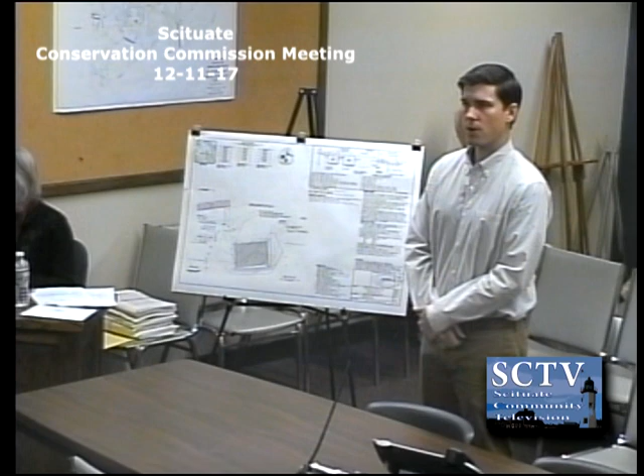Other than that, we do have a siltation fence going around the limit of the work, and the area will be reseeded and it will become grass after. There are 3 trees that need to be removed. Other than that, yeah, it's all grass. We are waiting on additional comments from the Board of Health, so we'd like to kind of hear your input on it, but we're not looking to close the hearing this evening.

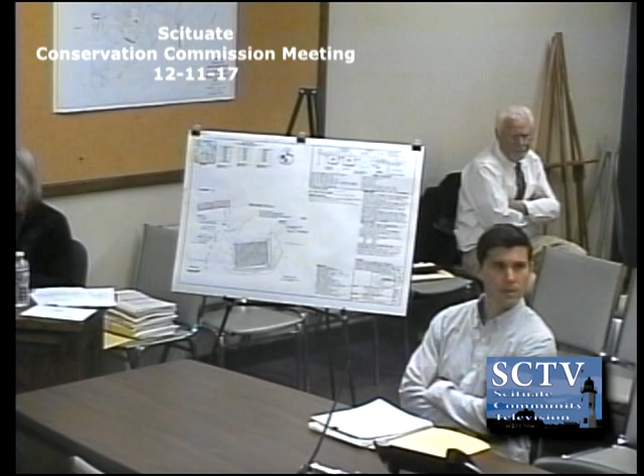Which direction would that make a difference? Honestly, I'm not totally sure. It has to do with working around the tee boxes and the greens, and the grading as well.

Do you not know if it's gonna go closer to the house? We're very far away from the marsh, it's kind of just fine tuning. We might move it a little bit one way or the other, but it won't move very much at all.

If you look at this plan, Penny, it's a good distance away. Well, he said 10 to 15 feet it might be moved, so I... Yeah, but even so, that shouldn't be a problem.

I think I'd recommend keeping it open, just in case a revised plan comes in as the final plan.

And you're with it here because it's within 100 feet? No, because we're in the floodplain.

Okay, anybody else in the audience? So I make a motion to continue the Hatherly Country Club to January 8th at 6:15. Hopefully it should be pretty quick. Second. All in favor? Aye. Thank you.

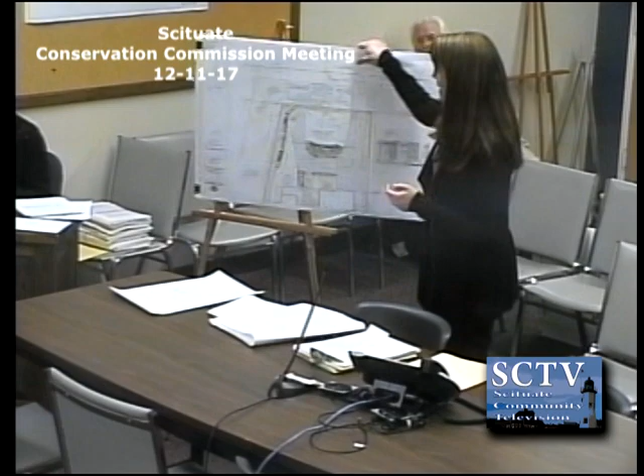My name is Tish Campbell, I'm a landscape designer representing the Keblers at 104 Edward Foster Road. They would like to extend their driveway to make a crushed stone driveway. The property sits between the marina and the ocean, so it is part of coastal storm flowage in this area.

The marshes over in this area have a 50-foot and 100-foot zone. They really wanted an asphalt driveway, but we told them the best thing would be a pervious driveway of crushed stone. So we designed a small parking area and a turnaround so they could exit in a safer way onto Edward Foster Road, because it gets kind of busy, and guests would have a place to park instead of parking on Edward Foster Road.

The base course will be crushed stone for some part of this area in order to get it to perk into this area here. We have also designed a rain garden, and I have a small detail picture of the rain garden if you want to see it.

There's a detail for your rain garden. I think there are two.

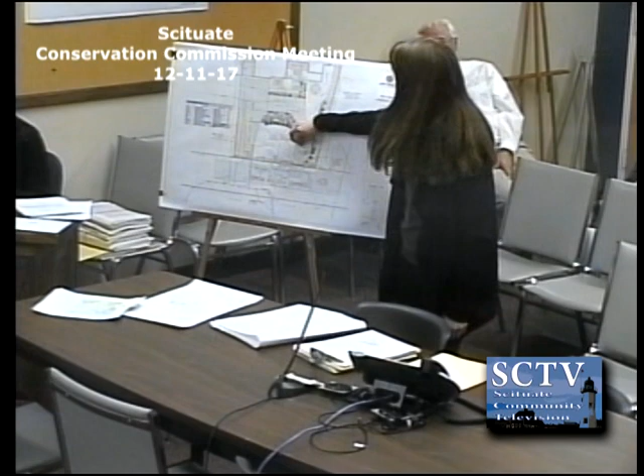The parking area here drains all into the rain garden this way with all the plants. This extension is constructed so that it drains into the neighboring lawn areas. The area as it is now is already disturbed, just a front lawn type area, not native or anything like that. It's about 1,500 square feet that we would be disturbing and replanting with about 1,500 square feet of plants. Then this area would be returned back into the lawn area as it exists now.

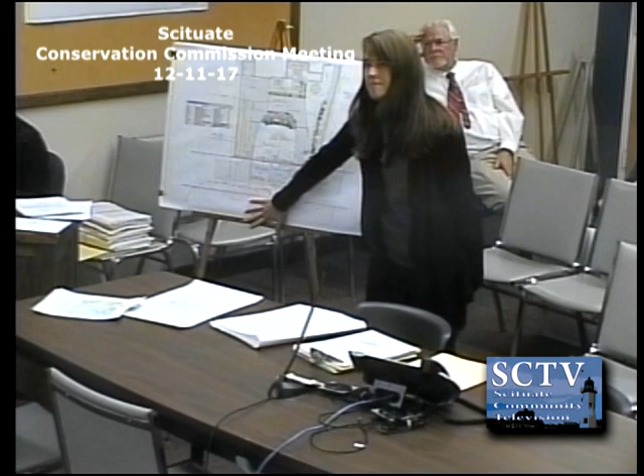Where's the line for the 50? It's here. The marsh is across the street, and the harbor. You've got wetlands and bank on both sides. So the velocity zone is up over on the other side, and this one is just the AE zone in this area.

Is the existing driveway asphalt? It's already there, yes. Be nice if they made that crushed stone instead. Nobody should have asphalt over there. I agree, but that isn't what they're asking. I know, I'm just making a point.

I'm shocked. We gave them good advice though, not to try to put asphalt. Not to try to put asphalt. No, it's a disturbed area, it's pervious, they're making it pervious, I don't see a problem. Unless Amy has an issue.

How many square feet is the proposed driveway? That's about 1,500, exactly 1,518. Okay, and that driveway is going on existing lawn, you said? Yes, this driveway is going on existing lawn.

So there's a gate and a gap in the hedges because apparently it was in the original plan to have a driveway that would go that way. So it reads as if there is a driveway there, but it's just lawn.

We just redid that house a couple of years ago. Amy, thoughts on this? Yeah, no, I don't have substantive comments either.

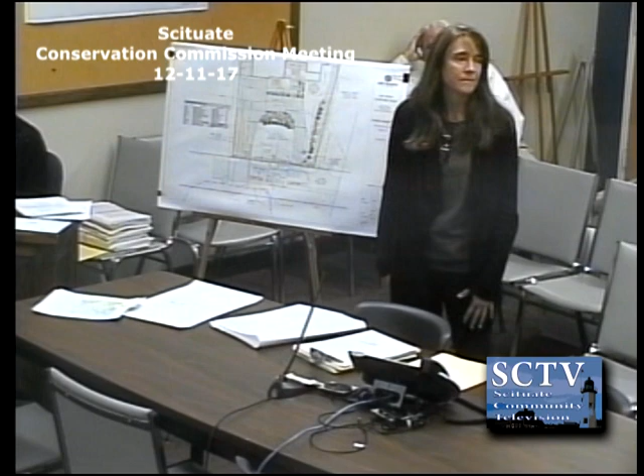it's the resource areas across the street, it's already been disturbed. They are compensating with the stormwater controls, the rain garden and nice plantings, so all good, things are pretty straightforward, it should be good.

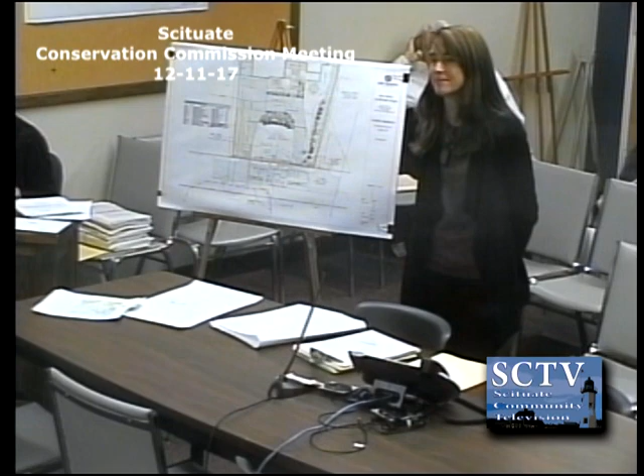Anybody in the audience to speak to this? Any issues, Frank? No, I don't think so.

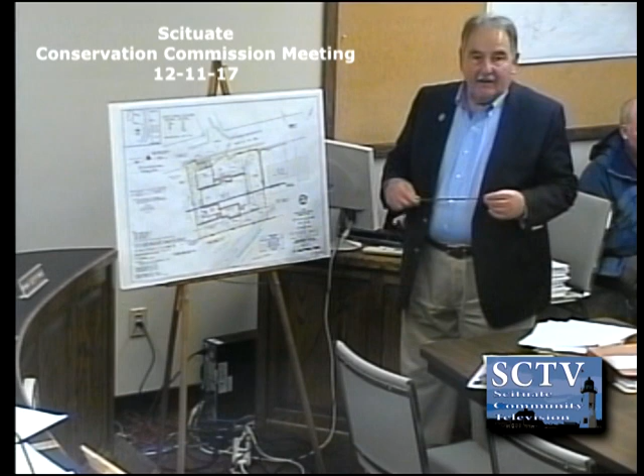At the last meeting, I had estimated roughly 1,200 cubic yards of fill. That's been reduced to about 400 cubic yards. The fill would be underneath the house, and in the driveway that will slope from the street up to the house, and then there'll be some loam in the front yard as well to have a lawn and some planting beds in this area.

There's also a lawn area, or perhaps planting beds, down by the existing concrete wall, which is going to remain in place. What we've done with the fill is the top of this wall is elevation 13. We're going to hold the top of that wall and slope it back about 2% to elevation 14, simply to allow any water that comes in to flow back toward the ocean.

We're proposing to put the fill in here as required with processed gravel, which would be compacted, and on top of that we'll have approximately 4 inches of crushed stone underneath the house. So when you walk into the house, it'll look like a fairly flat area.

The front yard will be sloping from the front of the house out toward the street. There's also a swale proposed for the right side of the yard to direct the water down in this direction, which it is currently doing at the present time. But with the regrading, this swale will be more visible than what's there now.

This is the existing house to the right of us, which is fairly close. Right now, the contours on this plan are going in this direction. The water's all flowing from the northwest to the southeast, as opposed to straight down from the street.

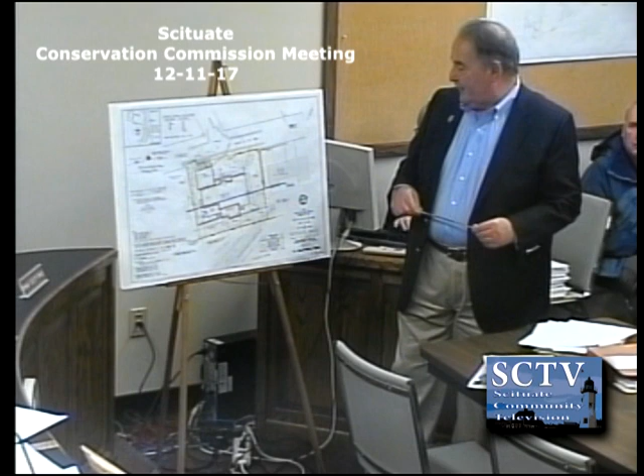So with that, I'll end and answer any questions you may have.

Oh, one other thing - by reducing the fill and changing the design, we were able to reduce the impervious area down to 6.9% from what it was before. Thank you.

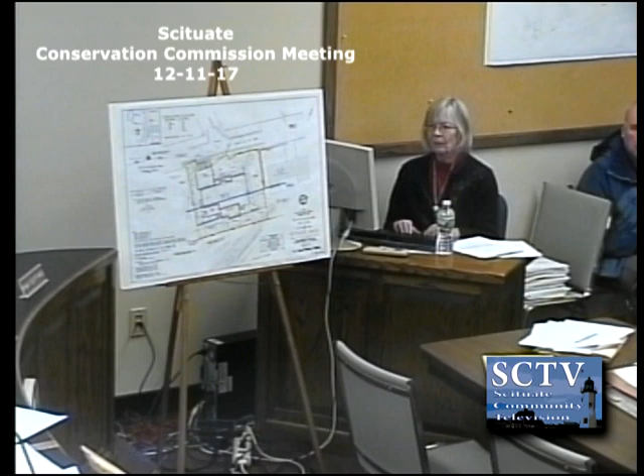I want to add that any fill - we received the revised plan, I think last Tuesday, so... No, the revised plan? We're still kind of processing it. Yep. Oh, yeah.

For the record, Jim O'Connell, coastal geologist and certified floodplain manager with Coastal Advisory Services. I was retained by the commission to do a peer review of this project.

This is, I think, the third or fourth revision, but the revisions I've seen so far have been very beneficial to the project - positive in terms of changing what was an impermeable driveway to a pervious driveway, particularly removing the vertical wall over here which was in the velocity zone and could cause unpredictable significant impacts, and removing the wall over here. So elevating the house above the base flood elevation to velocity zone standards, I think, is all very beneficial to the property owner as well as protecting the resources.

It's a complicated site in terms of what they're proposing to do, particularly the fill in the velocity zone and the significant fill in the A zone.

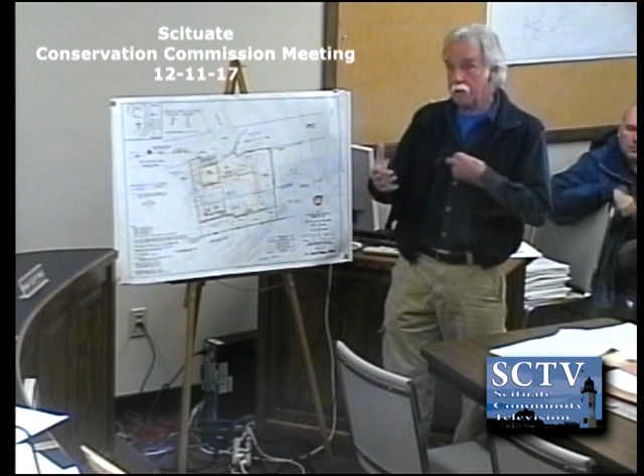I'm curious about the stormwater coming down this road. I've heard Paul say there's no water going onto that property, but I don't know if there is or not. I submitted a report today with photographs of this road. There are two catch basins that capture the stormwater, but the berm along here is only about 6 inches high. I don't know the volume of water coming down this road onto this property, so I can't answer whether that's going to shed water over to this area. But you've already approved this vertical wall here, so if there were water coming down here, because of the fill, you're going to somewhat divert water in this area to the north.

But you've got this vertical wall, so I don't really see what's going to happen based on the contours. If the water were to overtop the wall, it's going to hit this fill here, and because of the contours, it's going to orient down into the 25-foot easement. I don't see that as a real negative - I don't think the water velocity is going to cause any significant impact. But I do find it curious, Paul saying there's no water coming into this property at all. We have a swale over here and contours over here - maybe this is for walking off the lawn, I'm not sure. But these contours, if there's rain coming off the road, will orient that runoff, if it's coming onto the property, down into the easement area. I don't see that causing a real significant impact.

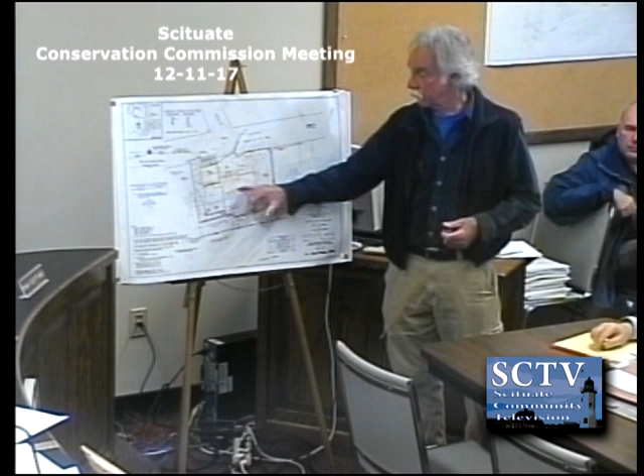My main point is that this small coastal bank here is playing a role in dampening some of the wave action, particularly in the A zone, in what I'd consider a wave area of 1.5 to 3 foot waves. I think we could work something out on that - that would be good. But I don't think the fill creating a flat surface is going to dampen it as much as this little basin and existing coastal bank in the area under the proposed house.

Can I ask him a question? Sure, Jim. I want to be very clear, because I questioned right from the get-go when I realized there was fill. Am I understanding that it would be better without the fill under the house? I don't see the reason for the fill under the house. Yeah, to me there's absolutely no reason to bring fill into this property, as long as the pilings are even on top - that's where the house is going.

It's an interesting question, because there are two answers. One, it's the benefit to the property owner. Well, that's not my concern. I realize - I need to tell you everything I'm thinking. There's a lower basin here where the water could possibly pond and cause a lot of turbulence under the house. In terms of protecting flow in this direction, the fill will diminish the protective quality of this particular coastal bank, as small as it may be - it's only 2 to 4 feet high, but it is playing the role. So I think the fill will possibly cause more flood flow in this direction under significant storm conditions, 100-year storm conditions.

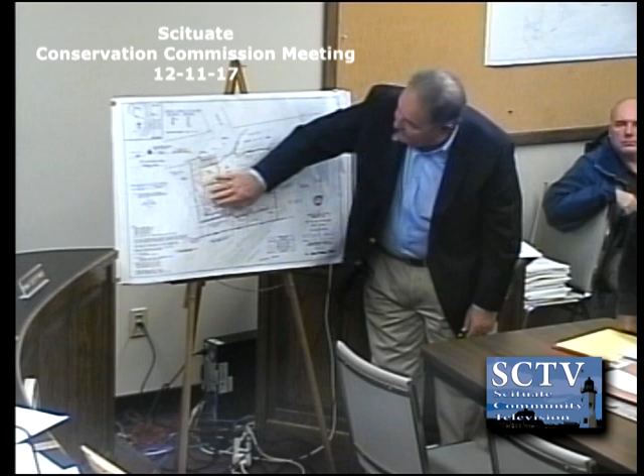This land in here, once the house is gone, it's going to be the same elevation as the land here. There's nothing to protect it. If this wall stayed here and we built it up, it would clearly stop water going this way. But even if you don't put the fill in here, once this house is gone and it's on piles, the elevation of this land is the same as the existing ground. I think putting that fill in there by leveling this off forces the water to come in here.

Absent any storms, when the tides come up, the water comes in here and it goes between the wall and this easement, and it comes up and would go in this way. Once it goes above 13, without wave action, it's going to overtop this and then come under the house.

But I don't know what the effect of this breakwater is. This is elevation 14. If the waves are at 17, and you've got a valley here, and then another wall, isn't this going to break the wave so the energy wouldn't be as strong as it would be if this wasn't here? This is breaking the waves. It will significantly break the waves. I think it's a real plus for everybody along there to have that.

But the point is, I'm going on FEMA's flood insurance rate maps, and they're saying that this area is subject to a minimum of a 3-foot breaking wave landward of the breakwater. The breakwater is tremendous, yeah. So you've still got 3+ feet of breaking wave on the lot itself, under the proposed house.

But you would have that anyway. Without the fill, you'd still have a 3-foot wave coming out of this property. What you said is precisely my point, actually, because the lower elevations under the house, fortunately, will cause turbulence, and it will help break up any wave energy on that particular lot, preventing any additional water where you fill it from cascading to the southern property.

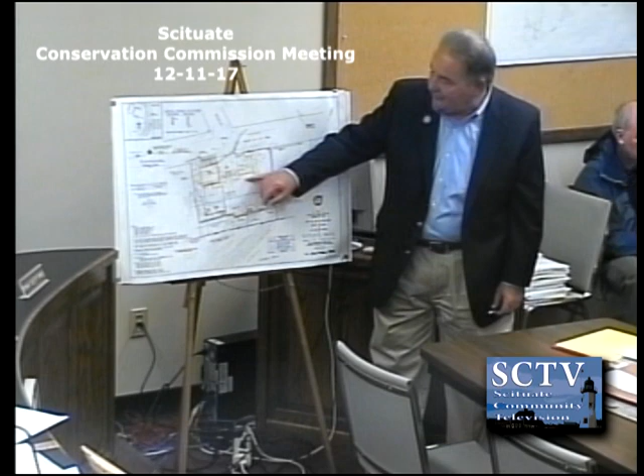This is the existing garage, which is elevation 10. The grade here would be about 13 and a half. So right here, you'd have about 3.5 feet, but once you get away from here, the fill is only a half a foot. It's gonna be about 2 feet here. This is where most of the fill would go, right in that one depression. Once you get over in here, there's very little fill. And then the rest of it's up in here for the landscaping.

To clarify things, I agree there's going to be great turbulence there, and it's already happening on that property. But my question to you is: the existence of that coastal bank slope, will it dampen wave energy relative to the fill you're proposing to put in?

We can talk degrees, and we don't know degrees, but in my opinion the existence of that coastal bank is going to help diminish some of the wave energy as it's cascading towards the southern house. If you put the fill in, you're still going to dampen some wave energy because of the composition of the fill, but the coastal bank is going to dampen the wave energy more so than the fill, in my opinion.

But once this house is down, you're up on piles. It's always hard to predict what these bigger storms are going to do. Because the land is sloping in this direction right now, the water's still going to go in this direction as it comes up.

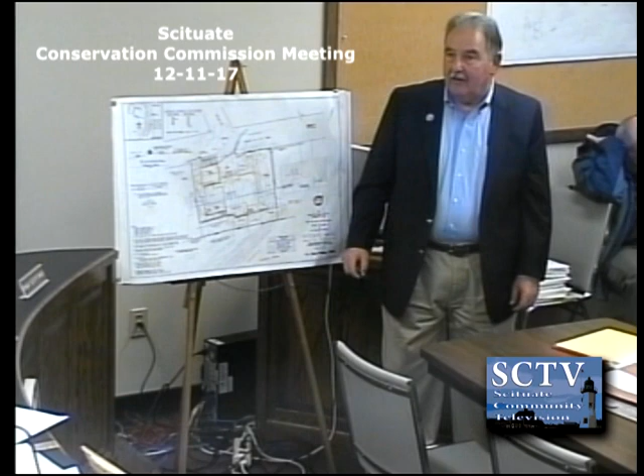Maybe in layman's terms, if that ground is sloping or uneven, as opposed to being filled and a level grade, that would tend to slow down that wave action, as opposed to filling it in and making it level so that the water would just move right across it, I think is the point.

And it's slow moving, slow moving, I'm sorry. There's a coastal bank there, at 13, right, Jim? Right in front of the front door, kind of right in the existing house, right here. So it's keeping this at the 10 and going up, creating that resistance when it goes uphill. Correct. So we can leave that.

It's under the house, I mean, at the end of the day. I have a question for Jim. So the first step... You two guys should probably just introduce yourselves. Oh, I'm sorry, I'm the homeowner. Ken Fitzpatrick. Steve Gard, attorney for the homeowner.

The first step would be that the 10-foot depression area would flood. That would be the first step of a coastal issue. And then over the top, the waves would start to flow.

I was wondering, how does the 3 feet of water that's now standing in the 10-foot area affect the wave action under the house, as opposed to if it was filled with dirt? Wouldn't there be more friction when the bottom of the ocean is closer to the top of the wave, to slow down the wave?

So now we've got 3 feet of water in that pool. Now the water's breaking over the top of the wall. How does that affect the coastal bank's effectiveness, I guess? It's as the water is moving south.

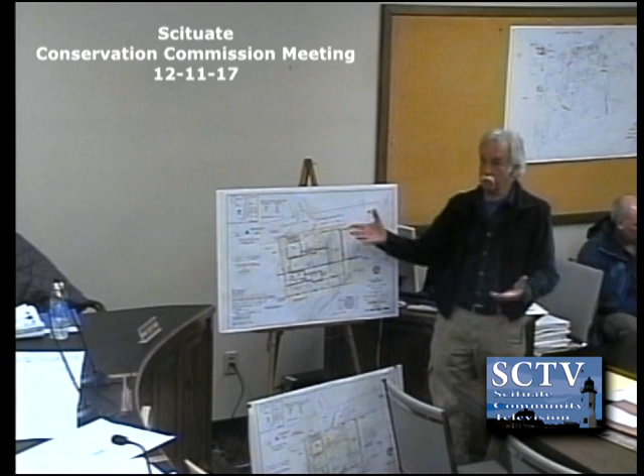I do have a question. Where's the garage? You didn't highlight it on your detached plan. I don't see a word anywhere that says garage. There's a garage somewhere, but you didn't color it. Here's your parking area. So you're saying the newer proposal, it's a proposal, right there inside the house. They're gonna drive into the house this way. It's a little deceiving, Jim, it almost looks like the garage is where the parking is, but beyond the driveway, the cars are gonna park here and here.

You have a 20-foot wall here. Top elevation 20, because the first floor of the house is 21. So what they're gonna do is drive into 20. The floor of the garage is 20, and they'll step up a foot to the first floor of the house. The top of the piles is 15, with a 12-inch frame on top of the piles. The top of the ring wall is 20 feet, concrete wall, and so is the floor of the garage, because the garage floor has to be lower than the first floor.

So it's, you pretty much want to keep that, but it's not really outlined on the plan. That's why I was wondering, where's the garage. There's no word that says garage because it's part of the house. Well, anyway, okay, I get it. It's an imaginary garage.

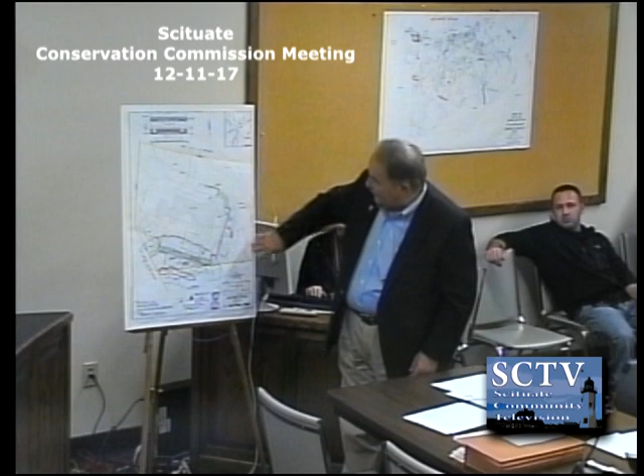Pucker brush? What is that? I'd call it thick undergrowth. I've heard of it. Nothing's in here, this is the wetland vegetation. You can see it over here as well. When they put this space in here, everything's coming back in over time.

A lot of what's there now, we actually planted just about at the 50-foot buffer zone, according to the original order of conditions that we had when we built the building originally. So some of that has survived, but most of it's been overtaken by the thorny pucker brush undergrowth, that's kind of nasty stuff. And there's a lot of poison ivy in there too.

Jen? Amy? Well, so this is a nice introduction to this project.

I did have a couple of things that came up when I reviewed the site plan. And I guess I would start with the resource area delineation, and having it be current, I think is important in order for you to be able to evaluate the area of alteration and what's going on here.

I know that Paul said that there was a request for determination recently that you accepted these same lines. The information that we require for notices are a little... Was that a repair? I didn't mean to interrupt. It was a repair, Amy. That was a repair, Frank. And Brad Holmes was out there like a year ago.